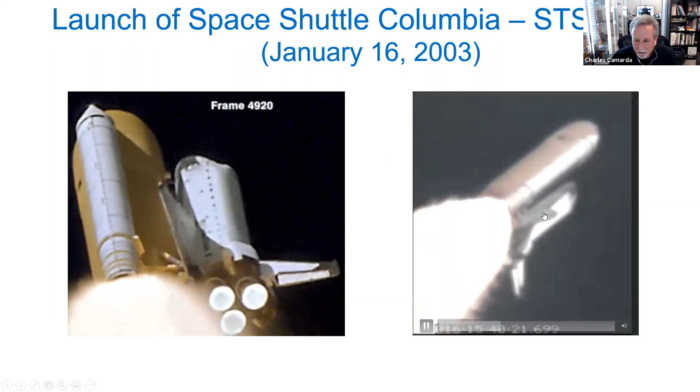If you look on the left, if you look on the right, it shows another view of that foam, and it's pretty obvious it strikes the bottom of the vehicle. Not quite sure if it hit the white section, which are the shuttle tiles, or if it hit the dark section, which is the wing leading edge.

What's important to note is that the people on the ground, the really smart engineers and program managers that were in charge of this mission, when they viewed that video and they ran their calculations, they determined that it was not a problem.

And what we all know now is that during entry on February 1st through the Earth's atmosphere, the vehicle broke up and we lost the vehicle and the crew.

So one of the main questions I had when this happened was, I was in Russia, was how could these really smart people make such a bad decision? And so even really good engineers, if they do not think critically, if you don't have a psychologically safe environment, what happens is you can't raise your hand, you can't speak up.

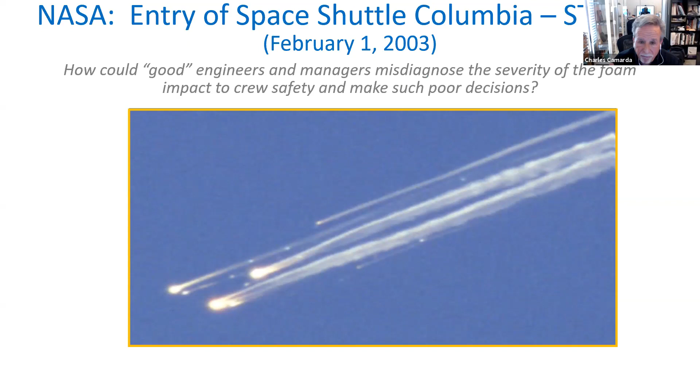And so this happened. And so we spent the next 2 years, 2.5 years, trying to understand the cause of the accident. We literally had and figuratively had to pick up the pieces.

We had about 85,000 pieces spread across southeast Texas. We had hundreds and thousands of folks combing the area in these rural areas of Texas, picking up the pieces, putting them together, and now we're trying to do that forensic analysis, trying to put the pieces together to figure out what caused the problem.

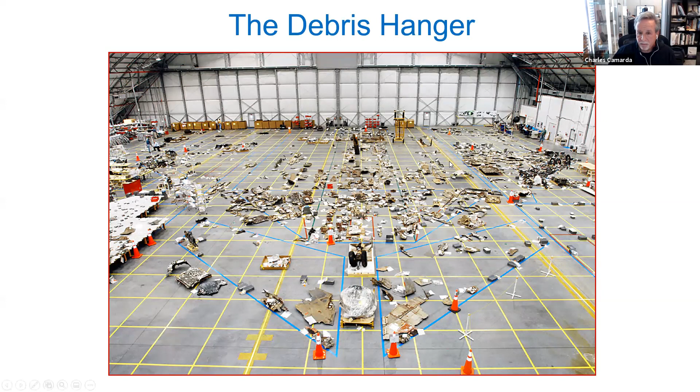And so this really began the origin of the EPIC Challenge program. We developed an innovative conceptual engineering design methodology, or ICED, and I'll talk about that. We started right after the accident, putting teams of people together to understand what caused the problem.

We then created a small team to determine a repair technique on how to fix the wing leading edge.

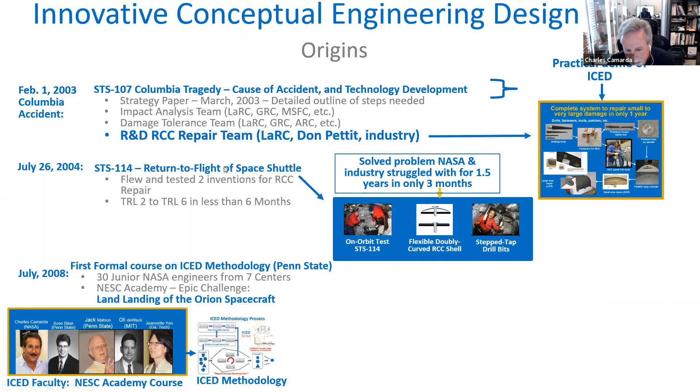And then after I came back from my mission, basically developed this methodology and this program with four other faculty from Georgia Tech, Penn State, and MIT. And we taught it for young NASA engineers.

So in 2008, we developed this methodology. We went to Penn State, and in 1 week's time, we took 30 young NASA engineers and we ran them through this program.

And the problem that we picked was a challenge that even NASA was struggling with at that time. It was basically designing a capsule to land safely on land. As you know, Space Shuttle lands on land, but it's a winged vehicle, and all of the United States' space capsules land in the ocean.

Okay, so we went to Penn State, we posed this problem. We created an environment where the researchers were immersed in the problem. They could then use the facility there to use computer programming to kind of analyze the problem and build some of their ideas. So they were able to prototype some of their ideas.

We ended up with dozens of ideas from that 1 week training session. And we selected only one of those ideas, which you see here, which was an airbag concept. And we basically took that one concept and we went to a group of students.

We had an MIT master's degree student, Sydney Do, and 8 MIT and Penn State undergraduates work with her for about 2 years on and off. They matured an airbag concept and ran a series of subscale and full-scale tests. They proved that their concept would work, that it would enable astronauts to land safely without injury.

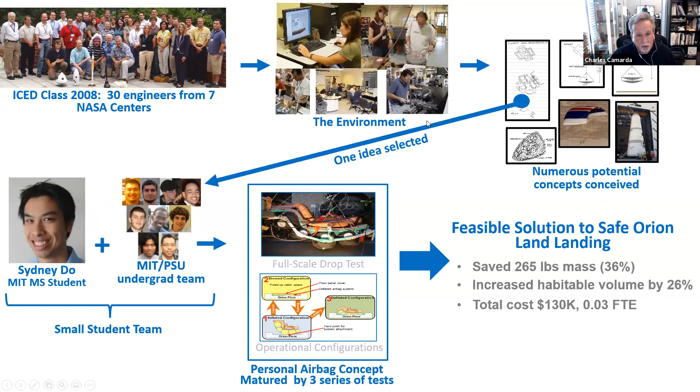It would also reduce mass by about 36% and increase the habitable volume. This proved that the concept and methodology works, the idea that we could take some of these epic challenges to students like yourselves, and have students around the world help NASA and industry try to solve these really big challenges.

So these are some of the themes of the ICED methodology. The first one is the human mind, use it. We try to teach students to think creatively, use their mind, not only rely on computers. We want to teach them to work together as a team, not be arrogant, but accept everyone's input and factor that in when solving problems.

The other theme is understanding the mechanisms of failure. As you go through this process, as a member of a team you'll have lots of ideas. You're going to share those ideas, and what I encourage you to do is look at every idea objectively, even your own. Critically assess and think about all the different ways your ideas could fail. Failure is very important in this process.

Failure is not an option - in this program, it's a requirement. We're going to teach you as students how to design experiments so you can fail smart, fast, small, cheap, early, and often. We want you to fail intelligently, and teach you how to run experiments in the laboratory so you can close the knowledge gaps and gain as much information as possible to understand the problem.

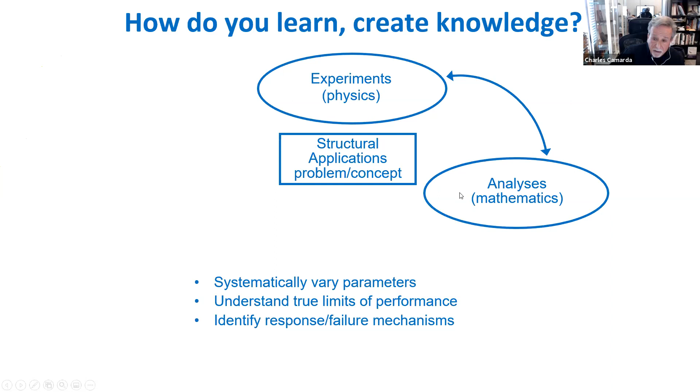When that happens and your analysis is then validated or verified, you can then use the computer and your numerical or analytical understanding of the problem to now look at lots of different ideas, lots of different variations of ideas, and you analyze them numerically. And you try to come up with an optimum design. You're constantly looking to improve your design.

Once you come up with what you believe is an optimum design, then you go ahead and you test that design by an experiment. You do this because more often than not, as you're moving through this design space, varying parameters, you may have exceeded an assumption or a requirement, and your analysis might not hold. So more often than not, you will find that happens, and then you go back to your analysis and add that constraint or that improved understanding of the physics of the problem.

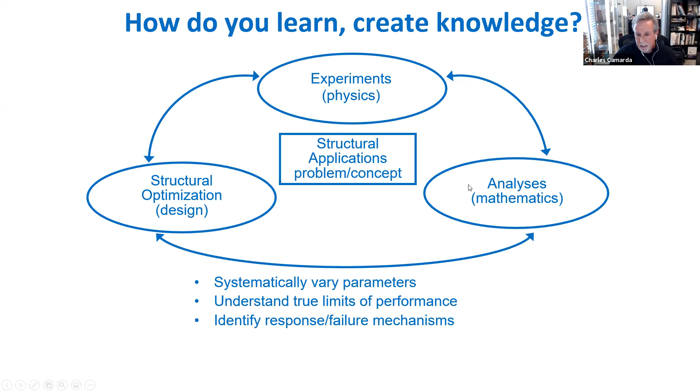The problem is when you're trying to design a hydrogen tank, hydrogen is a very small molecule and it's very easy for this system to leak. And so if you have a leak in this cryogenic tank, it could fail. It could fail because liquid leaks into the honeycomb. When you launch the vehicle, that liquid heats up, it expands very rapidly, it could blow the honeycomb apart.

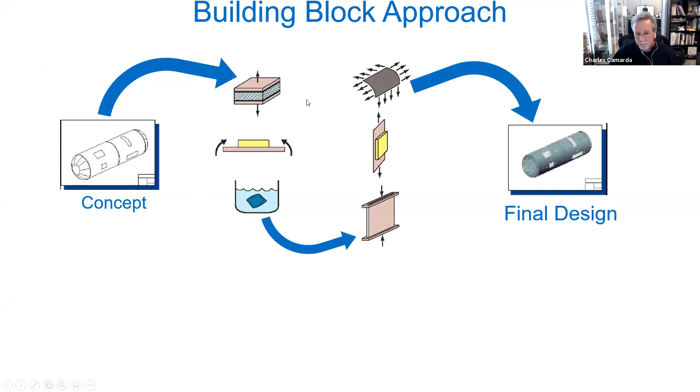So what we did was we designed lots of small experiments and we stepped through this process, gradually building up understanding combined loading that this structure would have to take in this cryogenic tank before we actually build the final design. Now, what happened was, and this we call intelligent fast failure, and we'll teach you how to do this as part of the ICED methodology.

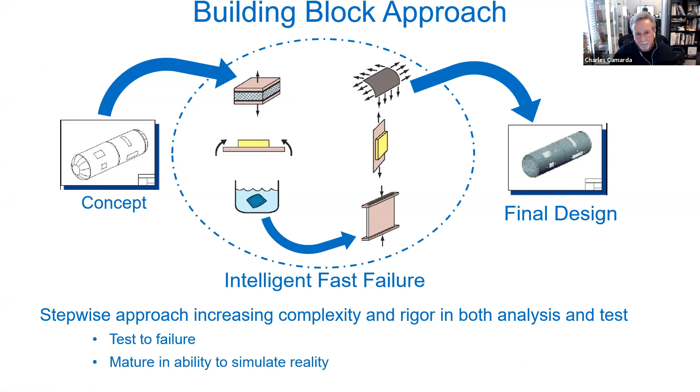But if you fail to do this, this is a real program, okay? This was a single stage to orbit vehicle called the X-33 vehicle. It was contracted by NASA to Lockheed to build a single stage to orbit prototype. It would be a demonstrator. What happened was the program built the very large honeycomb tank without using that building block approach.

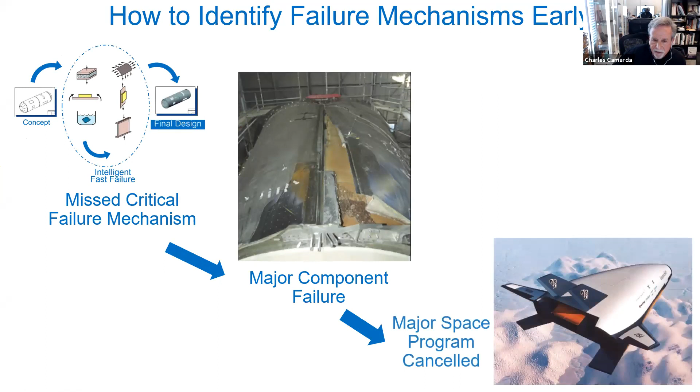And what happened was it failed in final design with a full-scale test. And because of that, it totally canceled the entire program. Because this failure happened late in the program, it cost a lot of money up to that point to actually build this concept. And when they failed, they had no backup. So what I'm telling you is by not doing that building block approach, entire programs could get canceled.

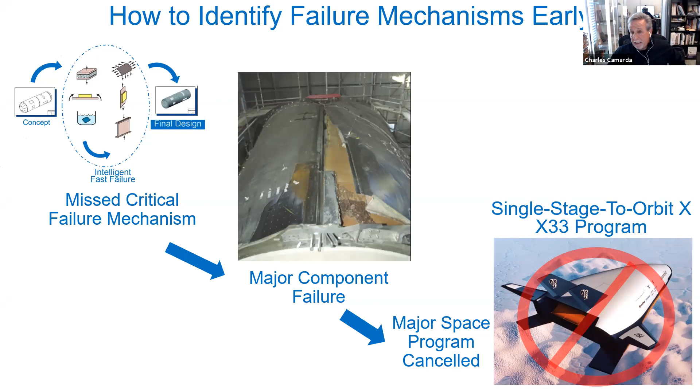So this is the ICED methodology. You're starting it just now. You're just starting to form teams. Very early on, we will teach you how to form teams, how to work together as a team, which is very important. And then we're going to teach you how to immerse yourself in whatever problem you're trying to solve. You have to work together as effectively as possible as a team.

So what you have to do is you have to quickly understand everything you possibly can about the problem. These are very large, complex problems, so you need to divide and conquer. You need to split up, and different people on the team look at different aspects of the problem. Then you have to come together as a team and share that information, and we'll show you how to do that.

The next phase, as you're stepping through this understanding of this problem as a team, is now once you understand or think you understand the problem, you have to try to come up with ways to solve the problem, and we're going to teach you how to do that. There are several techniques we teach you working together as a team, maybe brainstorming, biologically inspired design. We'll teach you different techniques for expanding and enhancing your creative approach to solving the problem, and then you'll end up with lots of ideas.

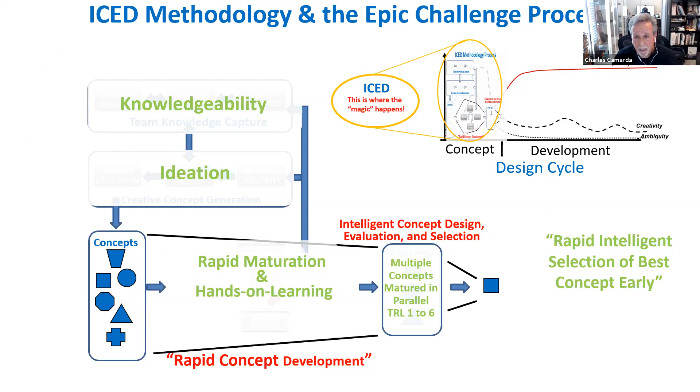What happens is we down select to an idea that we think is good without fully understanding that concept, without evaluating all the different ways it could fail. So we go into a development program, like you saw with the full-scale tank, with one idea. They honed in on an evacuated honeycomb core sandwich panel. Then late in the design cycle, as they're manufacturing a full-scale design, they fail. They have no backup and have to start from scratch. This is what causes lots of programs to be delayed by years in some cases, and for costs to rise exponentially.

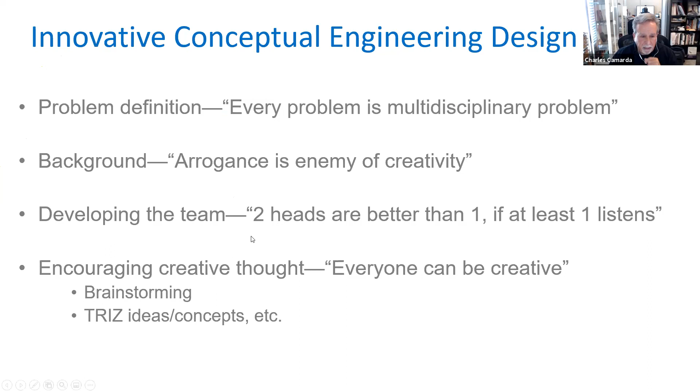So what we're going to do is show this ICED methodology, if you will, and apply it to the return-to-flight wing leading edge problem. Right now we're going to go through these steps: the problem definition of what caused the accident and the problem we are going to solve, how to repair a wing leading edge. We're going to show you a little bit about the team we developed, and some of the techniques we used.

So when we're looking at this problem, we have to look at all the different constraints on it. Once we understand what caused the problem, if we're going to repair the wing leading edge, we have to understand the temperature limits. How hot does the wing leading edge get at its hottest location? What happens if we just damage the coating slightly? Will that cause the entire hole to grow on the wing leading edge? Hot gases go in, and will that cause failure of the vehicle?

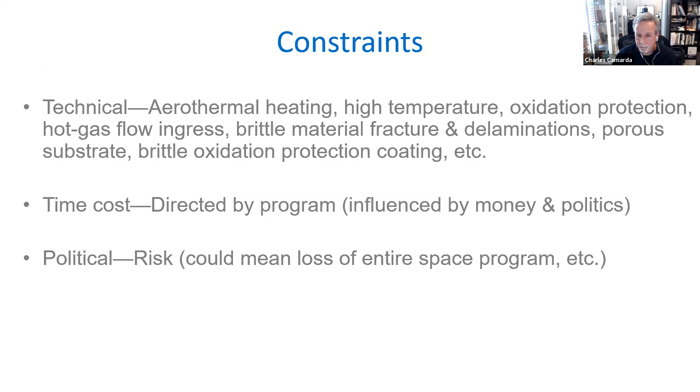We are often constrained by cost. NASA doesn't have a tremendous amount of money. We're constrained by time—we want to solve this problem as quickly as possible. We also have political pressure. If we fail to solve the problem and lose the next crew that flies, will the entire space program in the United States be canceled?

We have to think of all our techniques for fixing the vehicle. How are we going to operate those solutions? In other words, if we're trying to fix a wing leading edge on orbit, we have to think about the astronaut in the spacesuit, constrained by the pressure inside the suit, the dexterity of the gloves, things like that. And once we come up with an idea, how are we going to validate it and make sure the people on the ground, NASA, and the safety people will certify that we can actually use this in space?

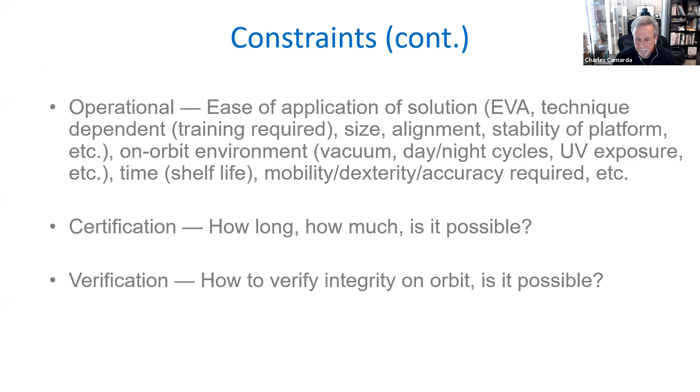Some of the things we also want to think about as we're looking at new ideas: we want to look at contradictions in the problem, because usually if there's a contradiction, this is an opportunity for a designer to come up with an enhanced or breakthrough idea to solve the problem. For instance, in the wing leading edge, thickening it to make it tougher will also cause the external surface to be hotter and might exceed the temperature limits. So we're going to look at some of these contradictions.

Once again, we want you to make sure we look at every problem as if it's a multidisciplinary problem and part of a much larger system.

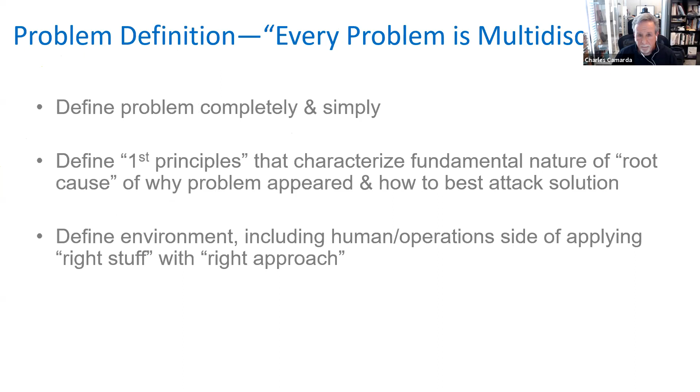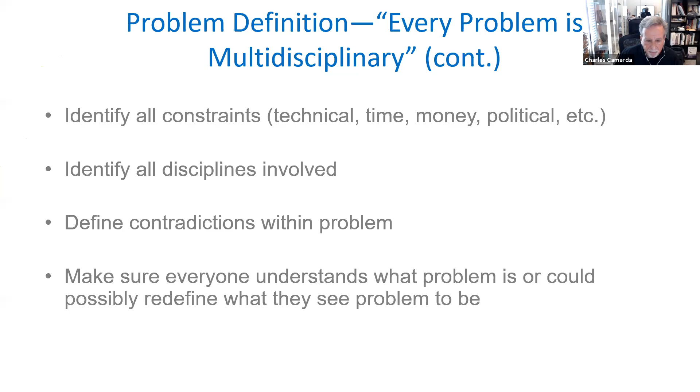Every problem's a multidisciplinary problem. We want to identify all the potential constraints, look at all the different ways it could fail, look at the contradictions within the problem to see if there are opportunities.

So for the wing leading edge, for the Space Shuttle STS-107 Columbia accident, we want to pan out and look at this problem.

So this is what NASA did. Basically, right away, they started looking at what was the root cause of the problem. A large piece of foam came from the external tank, the bipod ramp, and it struck the vehicle on the lower surface, either on the wing leading edge or on the fragile thermal protection system tiles.

Taking a look at that just gives you some idea of the size of the debris. The piece of foam could have been as large as 2 pounds. It had the density of about styrofoam, and it was traveling at about 545 miles an hour.

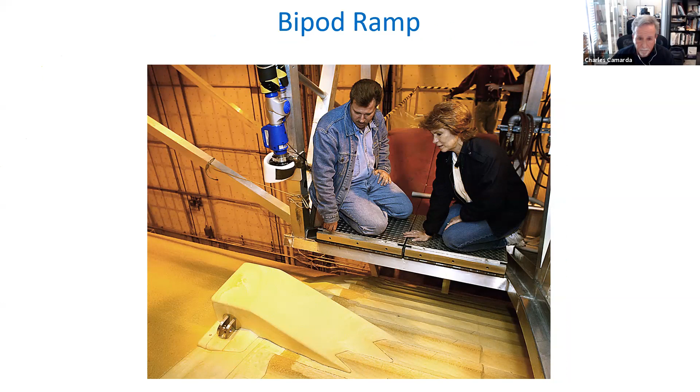They made these calculations based on the video that we received. They analyzed this video and they determined that the relative velocity of impact was about 545 miles an hour.

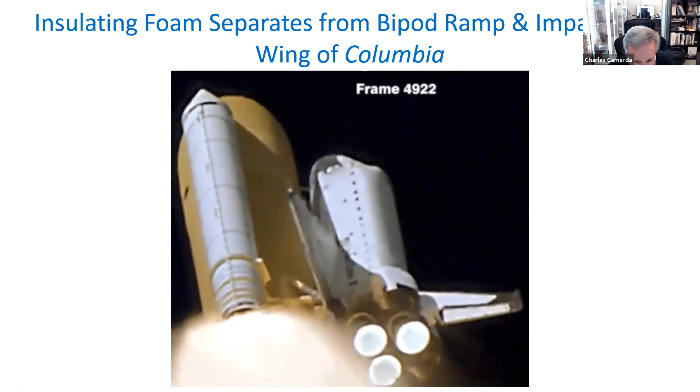So the people in the hangar at Kennedy Space Center, they started putting the pieces together, the debris that they found on the ground. These are the pieces of reinforced carbon-carbon wing leading edge panels 5 to 10 that were put together at the Cape. It's from the port wing leading edge.

They collected lots of the pieces, but some of the pieces were missing. We think a lot of the damage, based on the video footage, it appeared that it struck probably between panels 8 and 10. When they started looking at the debris of these panels, you notice the inside surface is coated with a silvery coating.

What we believe happened was the panel was damaged. Either a large hole appeared or a crack grew. Hot gases ingressed the cavity of the wing leading edge, and it was so hot it vaporized the metallic structure of the vehicle. That vaporized metal then deposited on the inside surface of the wing leading edge.

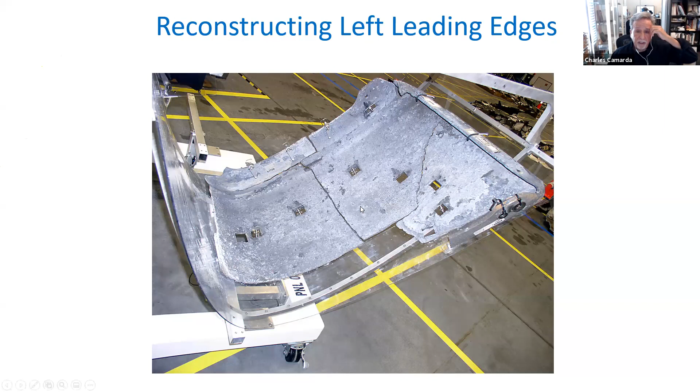This is what the engineers on the ground believe. It really appears that a large piece of foam caused the damage. So in order to understand if that was true, they developed a full-scale test.

The way they originally decided to do this test, it was going to be a full-scale test, a very large pressurized gas gun shooting a large piece of foam at a full-scale section of the wing leading edge. How they originally planned to run this test, had they done it the way they originally planned, it would have been a very dumb, expensive test.

They weren't planning on doing any analysis to understand if they could predict what was going to happen before this test. And they did not have enough instrumentation on the test element in order to correlate their analytical predictions with the test. If we had allowed the Columbia Accident Investigation Board, if we had allowed the engineers to run this test, we would not have been able to get much information from that test.

Instead, we told them to follow the methodology we showed previously, basically conducting intelligent experiments and using a building block approach. We collected the subject matter experts.

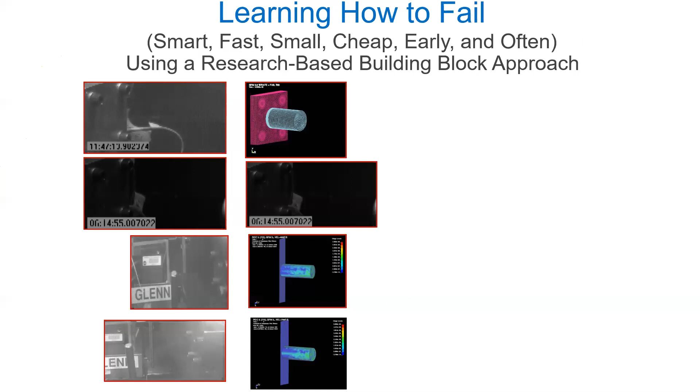They would have had to put in every new wing, a leading edge, and a new angle each time, if they wanted to do it that way. So exactly - as a research engineer, especially watching them proceed like this, I said, no, you have to stop this.

This is not how research engineers and real engineers solve this problem. It would have told the program office, hey, we understand what the problem is, but it would not have helped us proceed with the program and predict what size pieces of foam would be okay - when would we draw the limit? That's exactly right, Anna. So instead of letting them run this, we instrumented this wing leading edge.

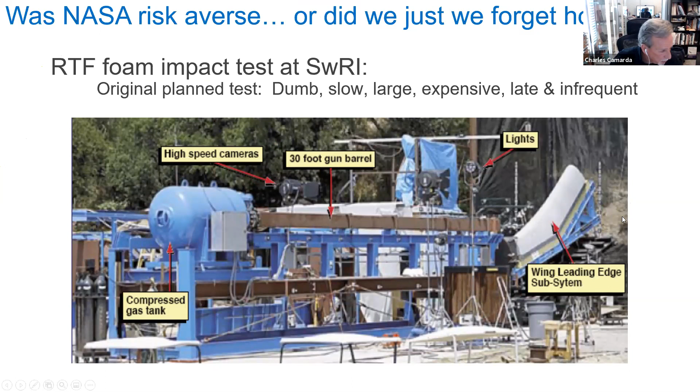With the full field photogrammetry system inside the wing, we could look at millions of points inside that wing leading edge. We can understand how it's going to deform, and we have test results that we can now compare with our analytical results. That's a very, very good question.

Does that answer your question, Anna? Yes, thank you. Okay, so what did we do? We went to the really good researchers at NASA Langley, at Glenn Research Center, and our friends at Boeing, and basically used a building block approach.

We're looking at modeling the foam, conducting tests of just small pieces of foam. Now we could run these tests - this is what I call smart, fast, small, cheap, early, and often. We can run hundreds of these tests inexpensively until we understand and can predict the physics of how that foam is actually going to fail.

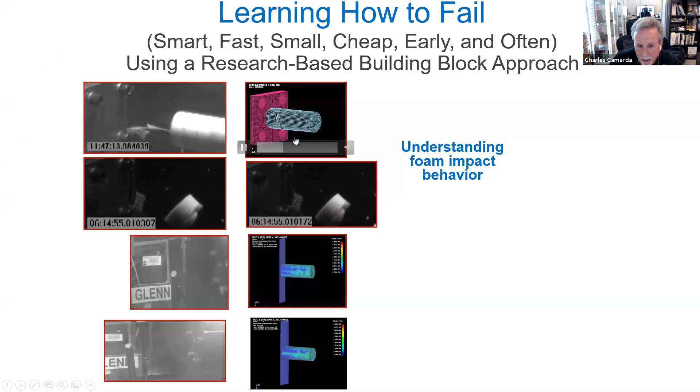So now you see we have good working models predicting how the foam fails. Then we proceed to conduct tests of that foam impacting material - small coupon specimens of the wing leading edge made out of reinforced carbon-carbon.

Now you see two tests at two different velocities. In one case there's no damage and the specimen survives. In the other case, there's lots of damage to the foam and also the target material, the carbon-carbon material. Now we feel like we understand the physics of not only the foam, but also the target material.

Now we can use those analytical models - this is what the scientists did - to predict what would happen. This shows an impact of foam to that full-scale wing leading edge that the analysts were able to predict prior to actually running the test. So now when we run the test, and this is a full-scale test...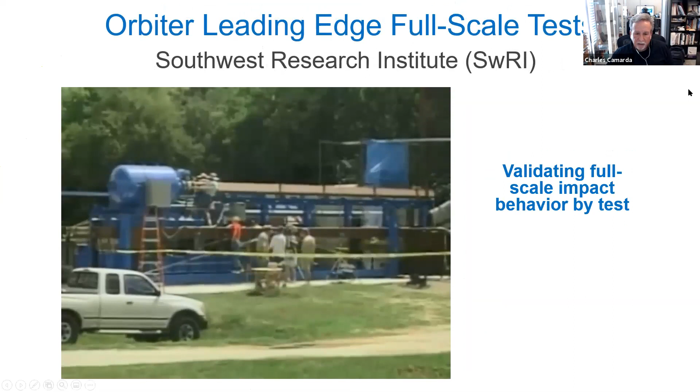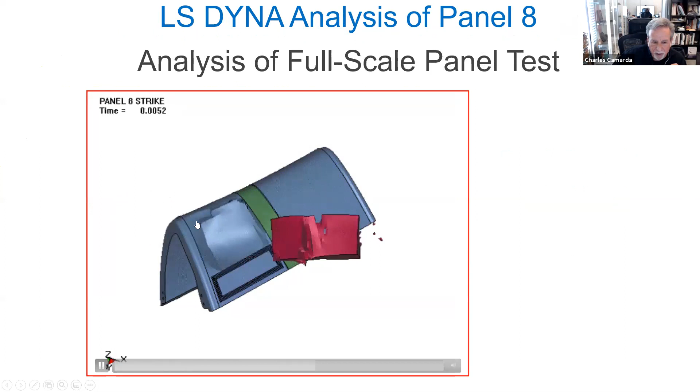You see what the folks predicted analytically was actually what happened. When you look at what they predicted, you almost see a 14-inch by 14-inch rectangular section almost coming away. And then when you look at the actual test, you see it's very good correlation with the experiment.

So continuing to do small tests and some large tests, we were able to develop a very precise way for predicting failure. So now we pan back out - that's just an example of using that building block approach and that method for constructing knowledge, going to the laboratory, conducting experiments. Now we understand what caused the problem - we know it was the foam. Now we have to figure out a strategy, and this is what the folks at Mission Control and at NASA had to develop.

This is almost every NASA center - we have people working on this problem. How do you develop a strategy to make sure that we won't have a problem the next time we fly, or if we have a problem, we can keep the crew safe? So the first thing we have to understand is what's causing the foam to come off.

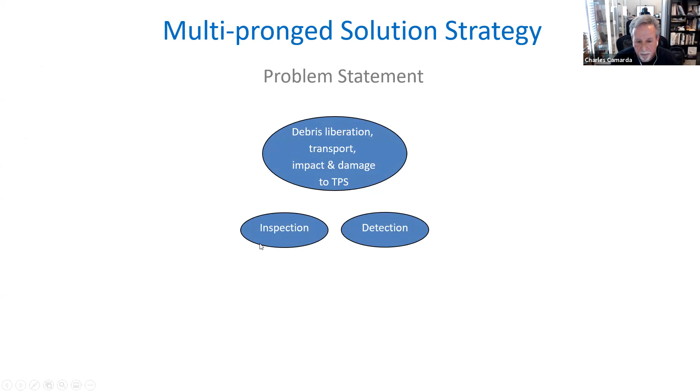We want to be able to inspect the vehicle after we launch it this time. Maybe put detectors on the vehicle to understand if a piece of foam hits someplace critical. This is what I call a multi-pronged approach to ensuring that we could fly safe.

So we're looking at ways to minimize or eliminate the debris source, ways to toughen the vehicle, and developing an on-orbit repair technique. If all else fails - if we have a large hole and we can't fix it - we're using the International Space Station as a safe haven. That means we take the crew, dock with the space station, the crew gets off, and we rescue that crew with another vehicle - flying another vehicle in time to bring that crew home safe.

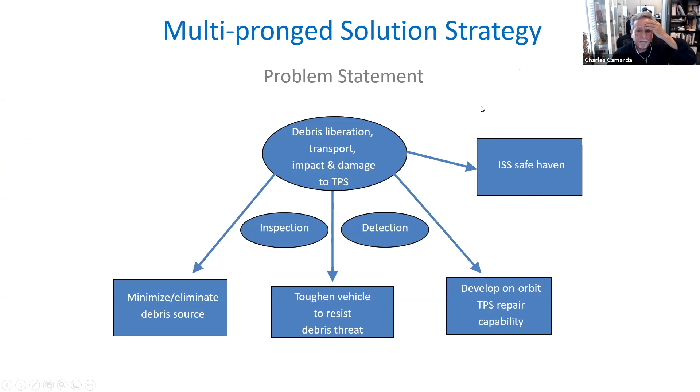The other thing we have to do as we're looking at all the different teams forming to solve this problem is understand the big picture. Remember, I said we have to pan out. You have lots of teams working on this problem.

We have an inspection team asking how do we build cameras to inspect the vehicle to determine damage. We have an impact threshold team that has to understand how small the damage can be and still be critical. We have to make sure that whatever instruments we design can see this damage. Otherwise we're flying blind, thinking we're safe when we're not.

So all these different teams have to work together. Information from one team has to be passed to the other team, and they have to work very closely. When NASA first started looking at this problem, these teams were totally independent and not communicating with each other. So as you form your teams, you have to make sure you have a plan of communication, and we'll talk about that.

Now, once you understand the big picture, let's zoom in on a particular problem. The example we'll zoom in on is the wing leading edge and fixing that large hole. One of the first things we do is understand the problem, dive into everything about the wing leading edge and its material, and look at other ways people have tried to fix structures in space, and analogous problems.

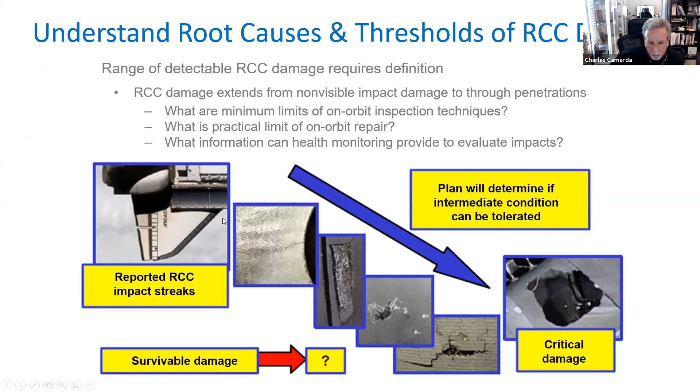We're trying to understand everything we possibly can about how a damaged piece of reinforced carbon-carbon material, the material that makes up the wing leading edge, is going to behave. So the first thing we have to do is bring in the material scientists, the people who understand how this material was made.

When you look at this material under a microscope, it's a system unto itself. It's composed of carbon fibers and a carbon matrix. The outer layers of that material, on the inside and outside surfaces, were conversion coated to silicon carbide. Silicon was basically packed on the outside, then heated, causing a chemical reaction that created this silicon carbide coating.

Now you have two different materials with micro cracks, so they had to figure out how to protect this very fragile carbon material so it wouldn't burn up going through the atmosphere. Oxygen can now penetrate it, and if you add oxygen and heat, this material would just burn up. So the only thing protecting that material was this very thin, brittle coating.

You have to understand everything that was protecting that material from burning up, in order to figure out how, if you have a crack or a hole in this material, you could possibly fix it. This is a special material — it actually gets stronger at 3,000 degrees than at room temperature. But you have to understand how this material behaves.

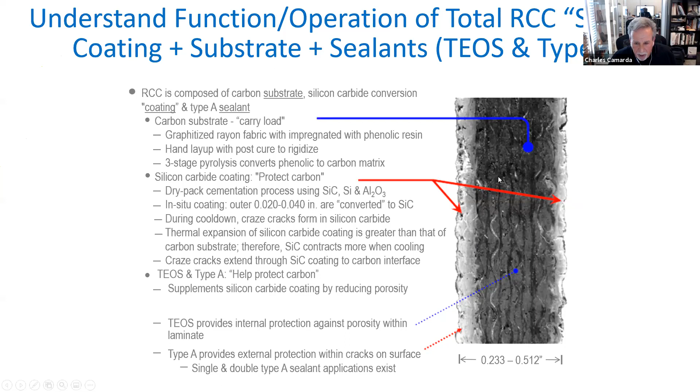When the flow strikes the downstream lip of that hole, the heating there is very high. So if the flow is at an angle to the vehicle, you have much higher heating in the downstream lip. This will determine how this hole grows, how fast it grows, and it gives us some idea of the limitations or what size hole could potentially cause critical damage.

What we learned from that was that the way we had been testing this material was 90 degrees to the flow, on the bottom. We thought that was the worst case. Once we learned that flow at an angle was a much worse case, we started to change the way we tested.

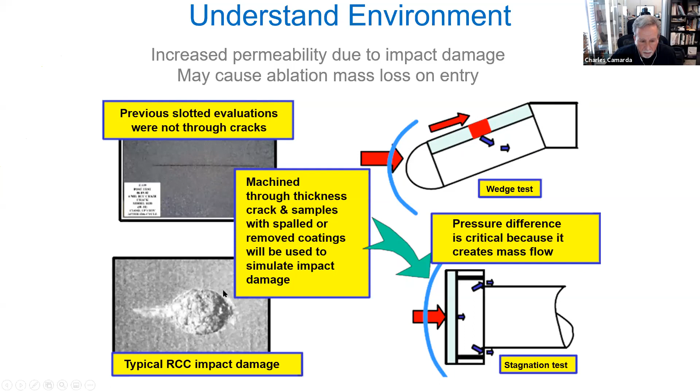We have small coupons of this material, and we're now damaging those small coupons with slits and impact damage, trying to understand how that damaged material will react and respond after 10 to 15 minutes in a very high temperature flow. Here the flow is from the bottom up, and you notice a small slit grows. Since the flow is from the bottom to the top, the downstream lip gets much hotter, so instead of growing symmetrically, it grows like a wedge.

So this analysis and this phenomenon that Pete Gnoffo determined using computational fluid dynamics, we now go into the laboratory and understand that this is a real phenomenon, and we have to change the way we test.

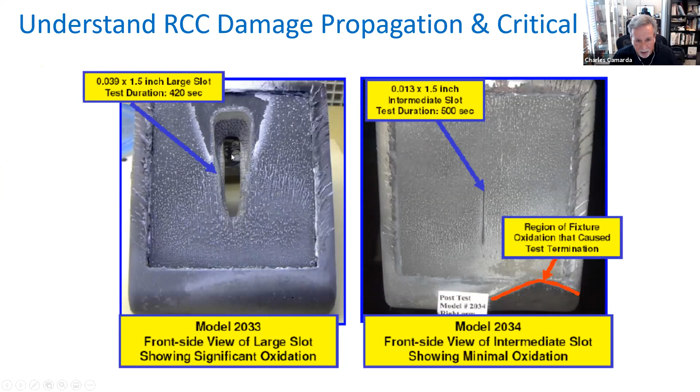We also need to understand all the different anomalies within this material. There are voids in the surface, there are delaminations. What happens if you have a crack? What happens if you have coating loss? One of the things we did was we looked at ways we could possibly repair this.

So we looked up— we have a question? Could I have another one?

Yes. I realized, all these years we talk about this, I never asked this question. The problem actually happened when they were coming back, during re-entry. So I'm thinking now, how come we didn't notice anything while they were going up? Because the hole was already there.

Right, the hole was there. That's a very good question, Anna. This crew, this poor crew of STS-107, did not have the means to basically inspect to see if there was a hole there.

People on the ground said maybe we could use U.S. Air Force assets, and they would be good enough to image the vehicle and determine if there was any damage. But the people on the ground asked to make that request to the Air Force, and people at NASA denied that request. There's a whole lot of other reasons why that happened, and it was a very bad decision.

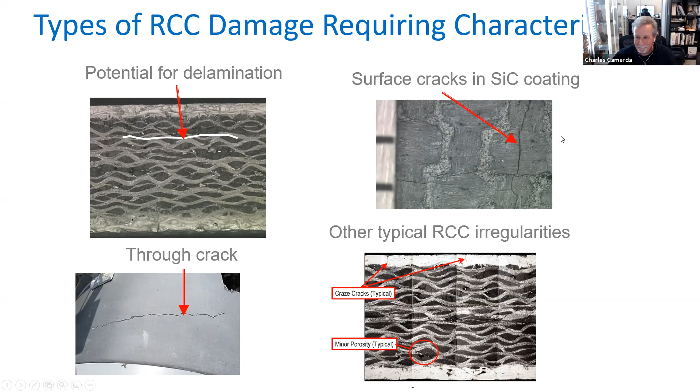Does that help? Yeah, thank you. Okay, and believe me, Antti, next time I see you, we could go into excruciating detail on this. Yeah, we can. But if you read the Columbia accident investigation reports, like I said, it's 6 volumes, and one of those volumes actually talks about the impact analysis and how little they really understood about the problem.

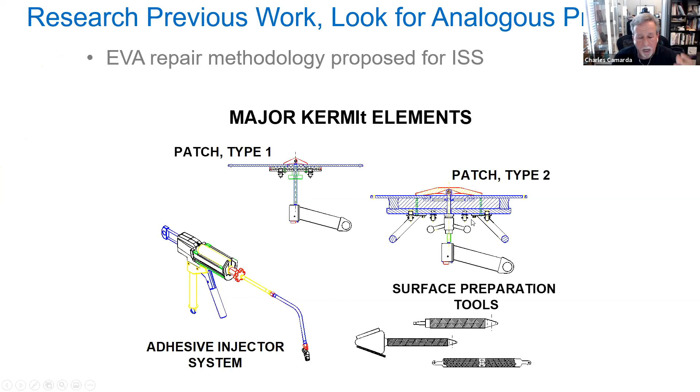Okay, so what I'm going to focus on now is the problem that we chose to work on, one of several, what I call an epic challenge: how do you fix that pizza box size hole in the wing leading edge? So I went back and looked at other techniques that astronauts had been training to fix a hole in the pressurized modules of space station, because I happened to be involved in this program, so I knew about this. When you're looking at fixing a pressurized hole in a large module, like the laboratory module, an astronaut goes outside, you basically put a mechanism with a toggle bolt, and you screw down a fixture, and then you inject an epoxy into that hole, and you make a nice, firm, solid repair.

What I'm telling the students is, once you're looking at a problem like repairing a hole in a wing, look at any possible way you could think of to repair a hole in something you're familiar with—it could be a tire, it could be the wall of your house. In this case, we were looking at something we knew we had designed and an astronaut would be able to operate in space. But these are the types of building block tests we would have to do eventually to ensure it was operable, that an astronaut could go outside and actually do this in space.

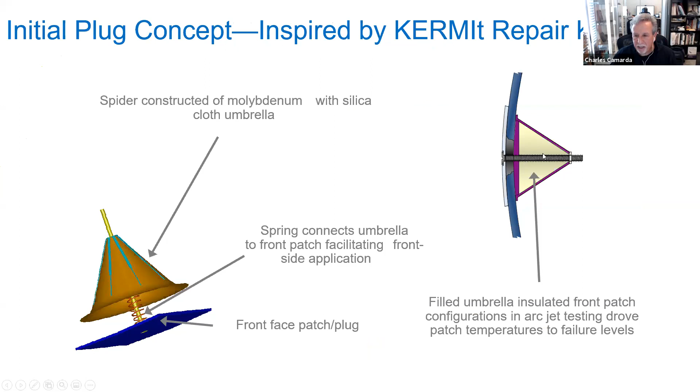So this is where we got the idea for this kind of patch that goes through, and we fill that patch with an epoxy.

I want to show some of the people we pulled together on our team. This was a gentleman who was a material scientist at ATK Thiokol, and he really understood how to fail smart, fast, small, cheap, early, and often. He started looking at hundreds of different ideas for designing a plug that would survive entry heating.

So you go about using very crude techniques so you could go through lots of different ideas, but you want to realize the techniques you're using don't exactly simulate aerodynamic heating. You're trying to simulate the temperatures and make sure this particular concept would survive them, but not the flow conditions—could flow go underneath that patch, and will that help erode it? But what it does is help you screen lots of different ideas.

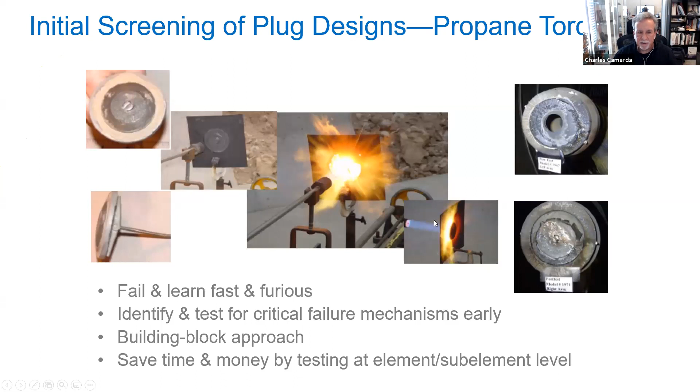And you can do this very cheaply, very quickly. So when you look at the designs they came up with, using those techniques and with very minimal analysis...

They came up with these very stiff plugs made of the same material as the wing leading edge, carbon-carbon. But the flow is from the bottom to the top, and these plugs were thick, so you have a bump to the flow. This bevel angle was steep, so as the flow hits that ramp, you get additional ramp heating. All these conditions, plus the fact that it was stiff, meant you needed somewhere between 1,300 and 1,800 plugs—you had to carry a repair kit with about 1,800 different shaped plugs to fit all the different curvatures of the wing leading edge.

The other thing the program office was looking at was how to fix just a crack. So they came up with a special material, a pre-ceramic polymer. It starts out as a polymer, solidifies in space, and forms a ceramic material. It's able to flow through a gun, kind of like a caulk gun. The astronaut applies it in space, and it has a whole toolkit that comes with it.

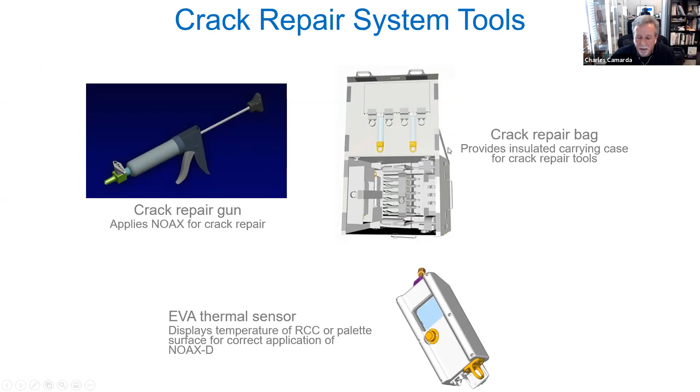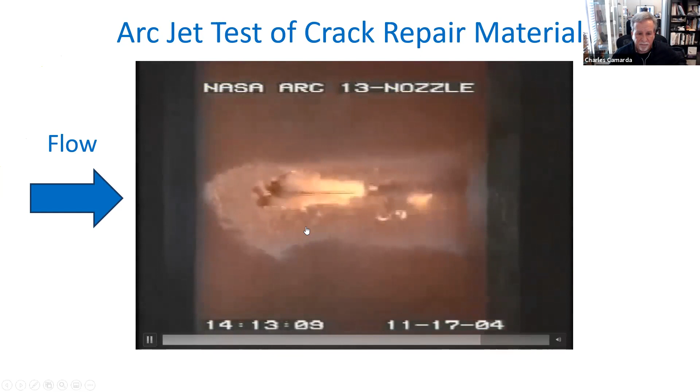But when we tested this material over a small crack, with flow from left to right, you see it getting very hot. As the material starts getting hot, even though it's forming into a ceramic, it becomes fluid and viscous, and starts to separate and move away in the flow. As that happens, the crack begins to grow, opens up, and you have a problem.

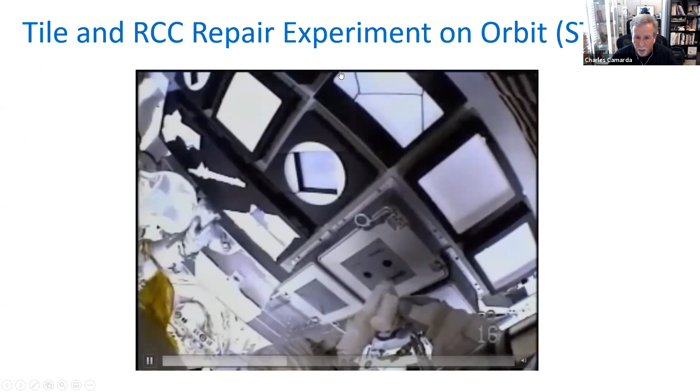So we tested lots of these ideas. In our particular mission, this is Steve Robinson and Soichi Noguchi—we tested ways to fix the RCC material on orbit. We had damaged tile material in the payload bay, so this is where we're actually testing these ideas and their operability in space.

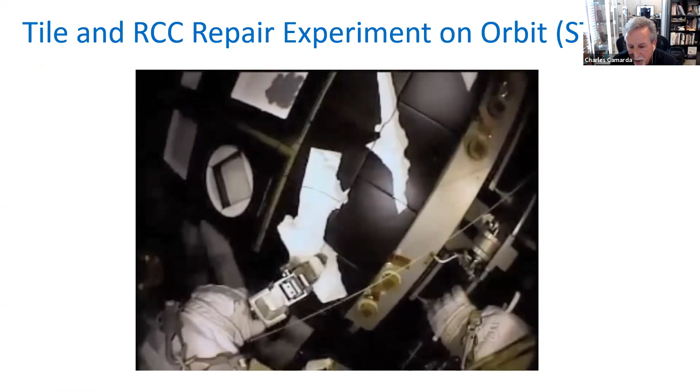Here he's using a technique for coating the white surface of damaged tile so it would have a high emissivity and wouldn't get too hot, but would radiate that energy to space. And it's showing you techniques for repairing it and applying it.

What I want to show you here is that after Steve Robinson tried to create as good a repair as he possibly could on that damaged RCC material, what happened was that material expanded in orbit. It outgassed because we have a vacuum in space, so any elements of gas trapped in that material, when you put it in a vacuum, would expand. Now, we tested this in vacuum chambers on Earth, but space is a very large vacuum.

So let's say you repaired a wing leading edge in space and it looked like this. Would that survive entry? How do we validate that that would be good enough to survive entry? And we could say, yeah, we'll put the crew on the vehicle and say they're okay to fly home.

When we actually tested repaired leading edge specimens, this one had a circular area that was damaged, but you notice that the material we used, that NOAX material, was slightly too thick, and it cracked. So when we put it into the arc jet and tested it, a piece of this cracked material flaked off, and that caused a step to the flow.

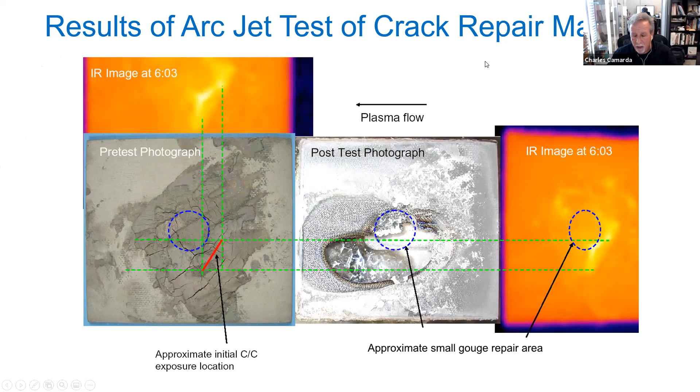That step flow caused this increased heating that you see here. So we think this was repaired, but we see that it actually caused additional heating and caused the hole to grow. If we would have used that material in that situation and said it was okay, we would have potentially lost another crew.

These are the things you have to think about when you're trying to investigate all your ideas. You may have been on a team that was looking at that material. You're excited, that's your idea, that crack repair material, you think it's going to survive. You have to look at all the different ways it could fail because you could be wrong.

When we saw that these teams were having problems, this is when I called together what I call a research and development team. This is when we had the Friends of Charlie come together and we used the ICE methodology and looked at all the different ways we could fix a damaged leading edge. So when I told you I want you to get together as a team and ideate, you draw different sketches and come up with multiple different ideas.

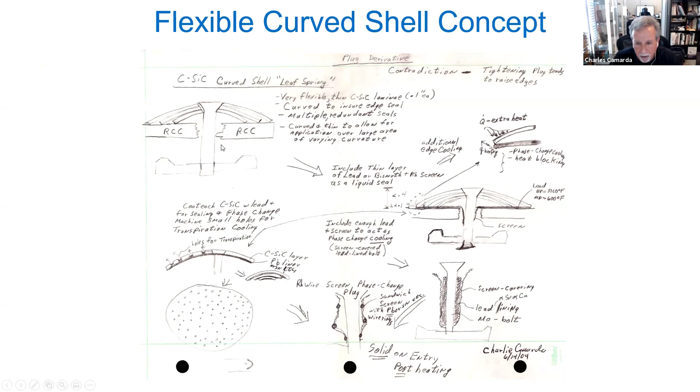You look at what happens if you have increased heating at this region. Is there a way you could design this plug so that a gap won't open up, flow will go underneath that plug and create a large hole. Look at multiple different ideas.

Then you go in the laboratory and start building these ideas. You look at all the different concepts, whether it's all the different types of materials you could use, and start testing all these ideas simultaneously. Our particular concept was a drill that you drill and tap a hole in the wing leading edge, put a fastener in that hole, and then basically screw down that fastener.

We looked at maybe using gaskets to prevent flow from going underneath, so we looked at all these ideas simultaneously. If we had a failure during this development phase, we had a backup. And we're going to teach you how to do that, that's called rapid concept development.

I'm just introducing these ideas. What I did was, when I formed this team, I went to my friend Don Pettit's garage laboratory without anyone knowing about it, and these are just some of the different ideas we were able to experiment with and test. So we formed a small team of people around the world.

They sent us their ideas, and we were testing them in the laboratory in Don's garage. And why did I bring Don Pettit into this team to solve this idea?

You're going to find this out. Sometimes you're going to look at your team and realize that maybe you might need some additional help on your team. You might have to expand your team, you might need to look for subject matter experts. I brought Don into this not because he was an expert in carbon-carbon material, he was a chemist from Los Alamos National Lab, but he had this amazing ability to think creatively, to think outside the box, and we needed someone like that.

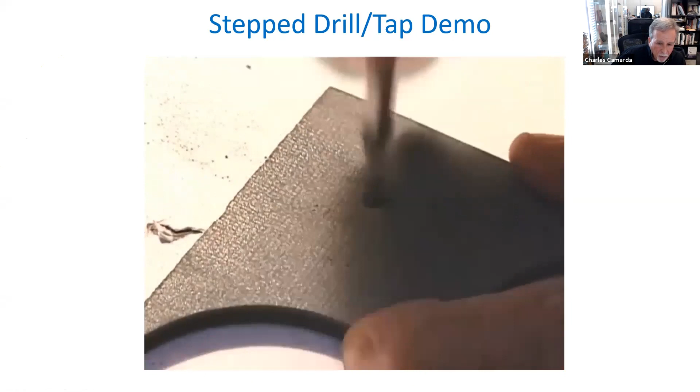So when people told us that it was impossible to drill through this material because it has a very brittle silicon carbide coating, what those people didn't do was they didn't use a punch.

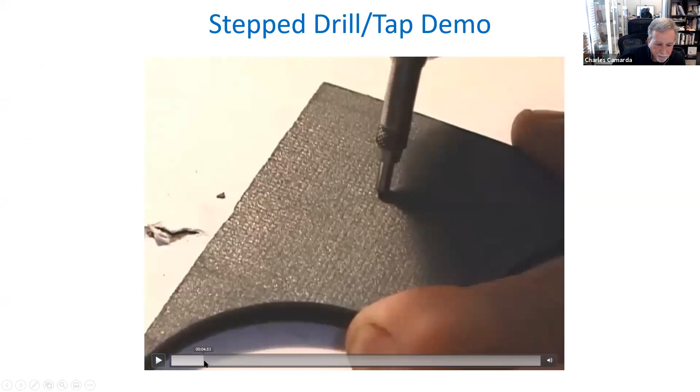Basically, what we did was we used a spring-loaded punch and chipped that coating. By chipping that brittle coating, we were then able to create a drill that could drill and tap precise holes through that material.

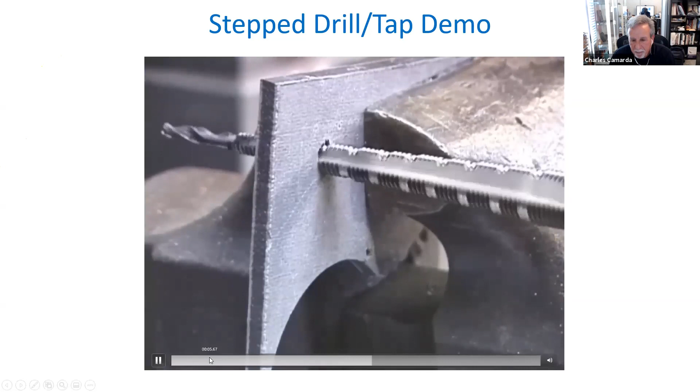And we're doing this in his garage. We solved the problem that teams of people at NASA and in industry failed to do. No one actually looked at chipping the coating before they drilled through it.

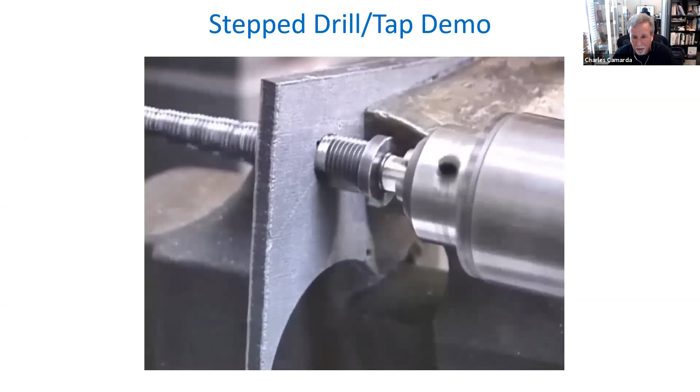So we came up with a solution for drilling and tapping a hole in a wing leading edge, and we validated it. We taught astronauts how to use the pistol grip tool and these drill bits that we designed, so they could drill and tap various size holes in the wing leading edge.

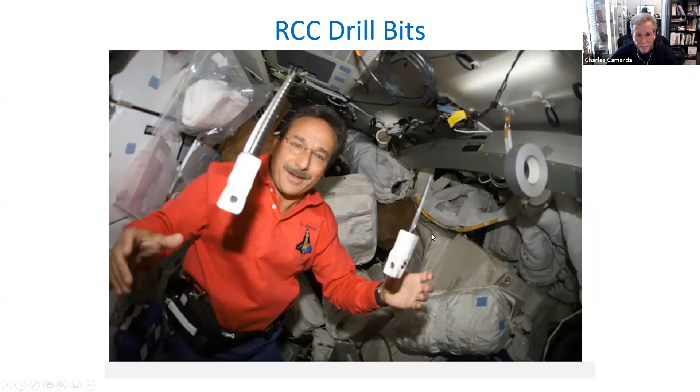This is a photograph of me proving that, yeah, not only could we build it, we could certify it. And I was actually able to fly it on the first mission we flew right after the Columbia accident. People told us this was impossible to do, and we did it in a garage. We got a patent for it.

This was another gentleman who helped us, who had a company in Fort Worth, Texas, Francis Schwind. He was one of the gentlemen that helped us build, not the drill bits, but different fasteners made out of carbon-carbon, different patches made out of carbon-carbon. We had to come up with a way to quickly produce these patches that we could test in the laboratory.

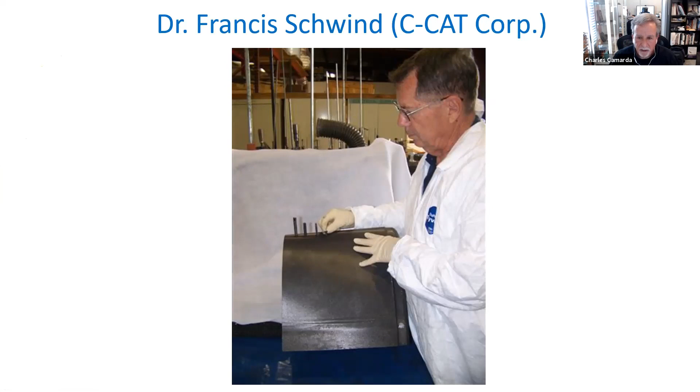I want to tell the teams going out and doing these analyses, you have to sell your ideas to upper management, to people, that your idea is viable. The people in the program office didn't believe our idea would work, so what we did was develop a prototype.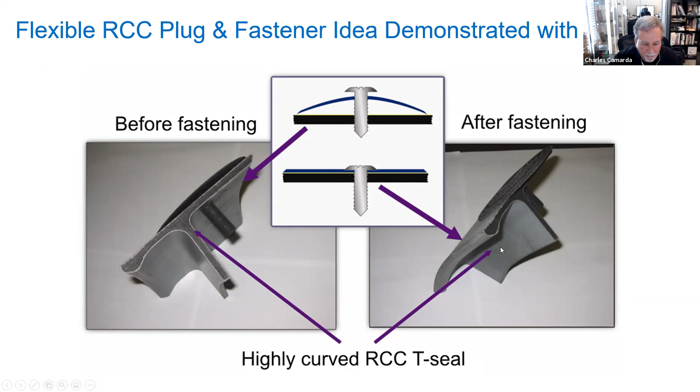We had a large curved section of carbon-carbon material, and we basically drilled and tapped a hole in it. We put in a carbon-carbon patch and a carbon-carbon fastener, and we did this right in front of their eyes, using the same tools an astronaut would use during a spacewalk.

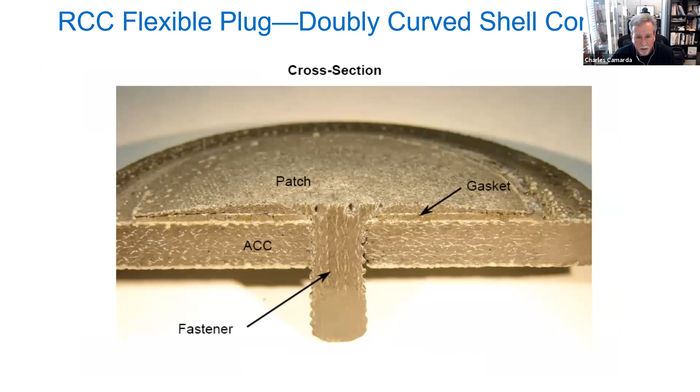This shows a demonstration of what that would look like. And this shows how later on we handed this idea off to other teams, so that large numbers of people now had to do the analysis to validate the size of these patches and what they would look like in order to fit all the different curvatures on the wing leading edge.

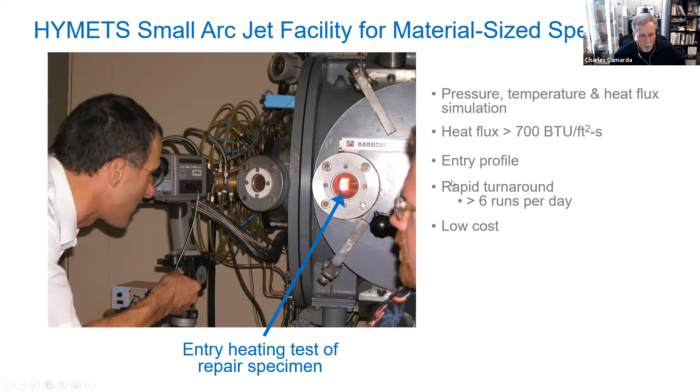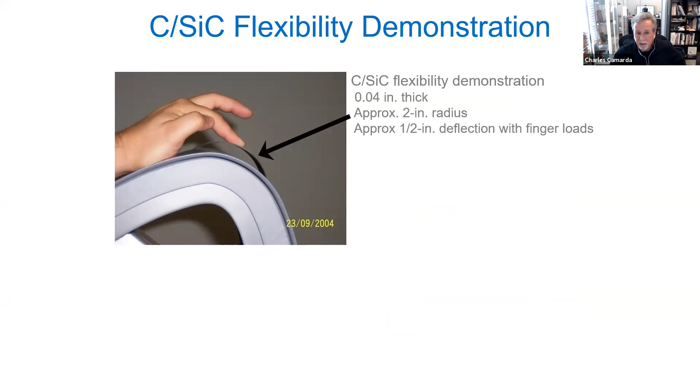These are the different types of testing that Don Pettit and I did. We went from a torch test to a very small arc jet facility that we were able to use. Once the companies realized we could commercially fabricate this material and that it could be flexible, they went out and designed their own patches.

They put large teams of people on this to actually design and validate the patches we would fly in space, and also the tools the astronauts would use, to validate that these patches met all the specific requirements to ensure they would survive entry heating.

This just shows how 8 to 10 to 18 patches would cover a large area.

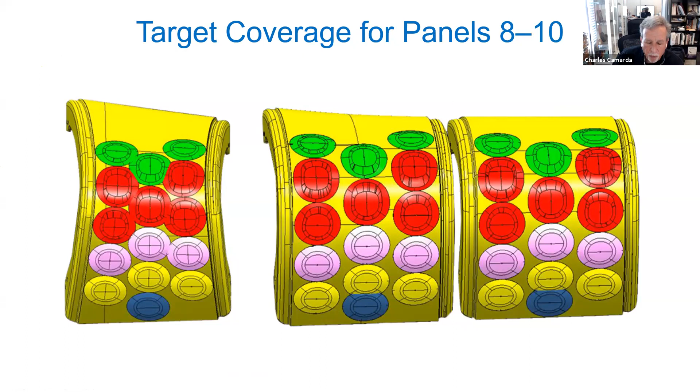This shows an example of why we need to use subject matter experts to understand this problem. The reason the program's patches were failing was that they did not have the right analyst analyzing this problem, and they did not ask that analyst the right questions.

When we put together our team, I brought my friend Pete Gnoffo. I asked him to analyze this problem using a code that he developed. He was an aerothermodynamicist, one of the top in the field in the world.

He looked at this problem, ran his code, and in one day was able to determine that if we maintained the thickness of the patch to less than 4/100 of an inch, and the bevel angle of that patch to less than 7 degrees, it would not fail.

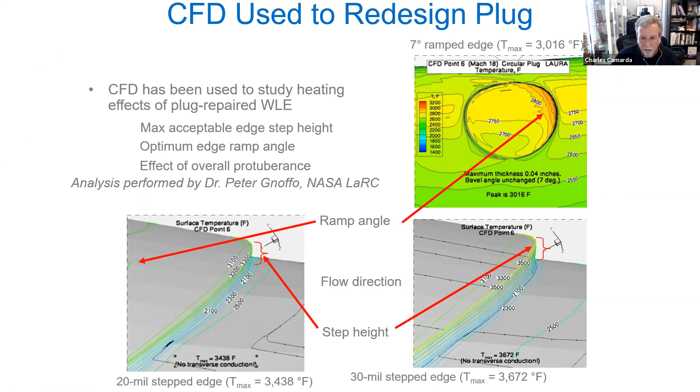With that information going to that expert, we were able to solve that problem in a short amount of time. We then designed a patch like you see here, and the leading edge heats up, but does not go above the critical temperature of the coating of the carbon-carbon material.

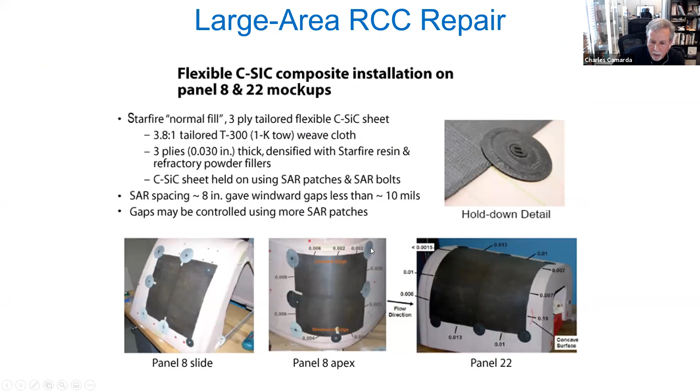So then we looked at not only small patches, but also a large flexible patch that we could carry in orbit, secured with the small patches we carry, so that we could actually fix a large pizza box size hole in the wing leading edge.

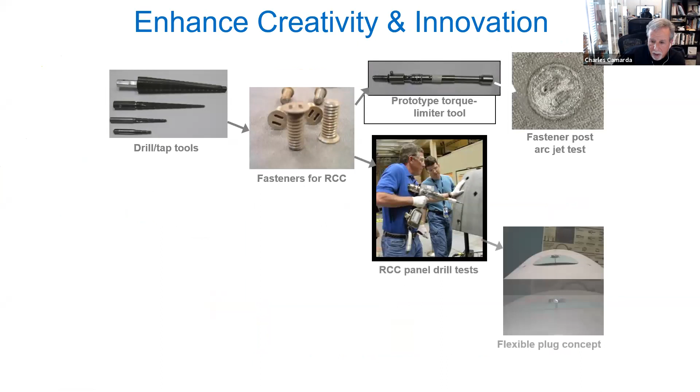This shows what a small team of engineers, like yourselves, could do, coming up with an innovative idea, maturing that idea to the point where we could prove it will work, then handing it over to a much larger team to do all the rigorous analysis and testing to validate these systems for flight.

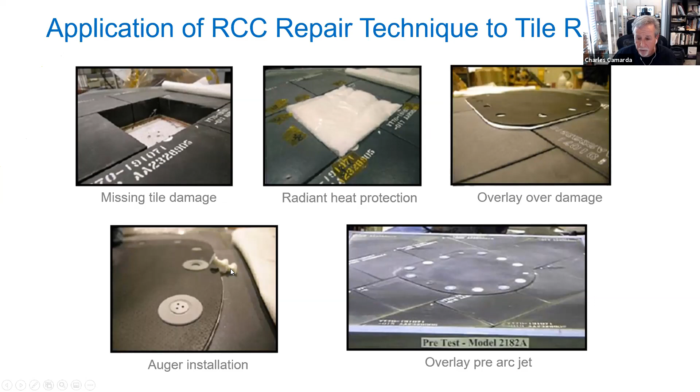Not only that, but some of the ideas we had for repairing a wing were also used by other teams looking at repairing shuttle tile problems. What happens if you lost a large section of tile? You could use an overlay concept like this. The fasteners would be different, but the mechanism for solving that problem was very similar.

So that's when we validated this methodology. We proved that it works.

What you're going to experience is working on these teams. We want to teach you how to work together physically as a team, but also virtually, like right now. We're in very tough times with this coronavirus, and it's forcing us to work virtually. How do we do that?

Luckily we're using Valamis as a platform. We could use other techniques for talking together, like Slack. Now you have the capability to link with each other, share ideas virtually, and connect with subject matter experts around the world to help you solve these problems.

This was the beginning lecture for the ICED methodology. You're going to go through all these different phases in detail with your instructors in Finland and in the United States, and these are some of the areas you'll get more training on.

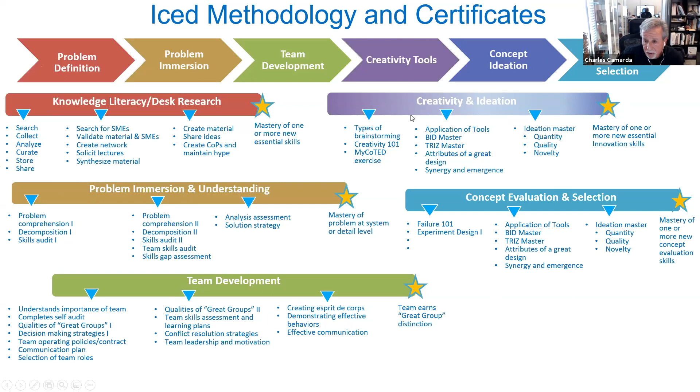Team development, problem immersion - how do you immerse yourself in the problem, how do you share that information and learn together as a team. You'll learn different techniques for thinking creatively, individually and as a team, and techniques for working together, program management, so that you satisfy all these constraints within budget and on time. Later this semester, you'll learn about rapid concept development.

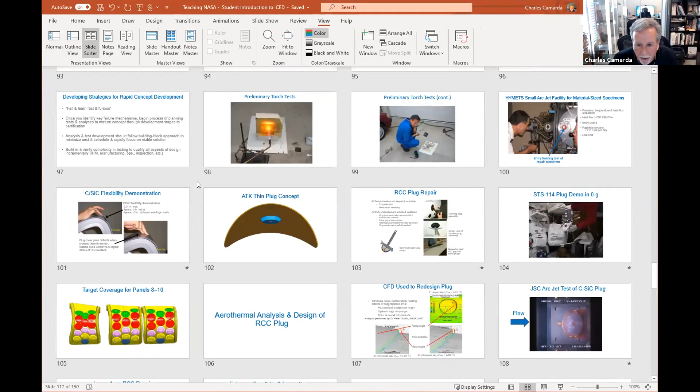When you look at this material, remember I told you it had a silicon carbide coating, right? That silicon carbide coating, when you think about it... can everyone see it now? Okay, the silicon carbide coating, Vinay, is very, very tough.

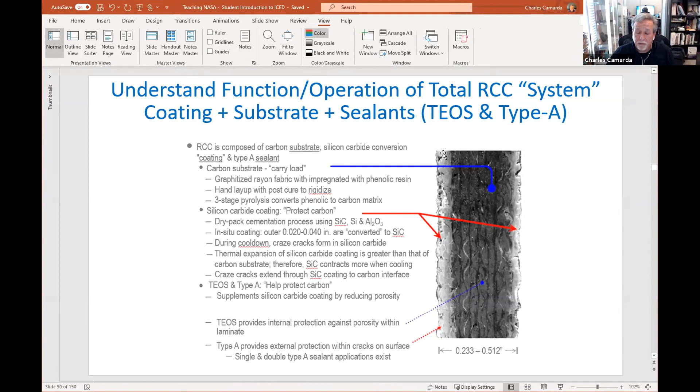As a matter of fact, they make drill bits out of this material. It's so tough and so hard that when people tried to drill through it, they looked at diamond tip drills, increasing the torque, increasing the pressure on the drills. What they realized was they could not drill through this carbon material. It was very tough, very hard, just the nature of the material. But it's also very brittle, right?

So as we were playing around with it in the laboratory, I just happened to pick up that spring-loaded center punch and hit it a couple of times. It cracked the coating.

The funny thing is, when you think about it—let me stop sharing my screen so I can see again—if you're trying to repair the wing leading edge, it would have already had some damage, right? So they should have tested drill bits on damaged leading edges, but they didn't do that.

When you think about it, astronauts going out there, it doesn't have to be a spring-loaded center punch. They could take a tool and basically just chip that coating. But the key was chipping the coating. And when you think about these really smart PhDs in structural mechanics and material science, people trying to design drill bits, no one thought of damaging the coating first and then drilling through it.

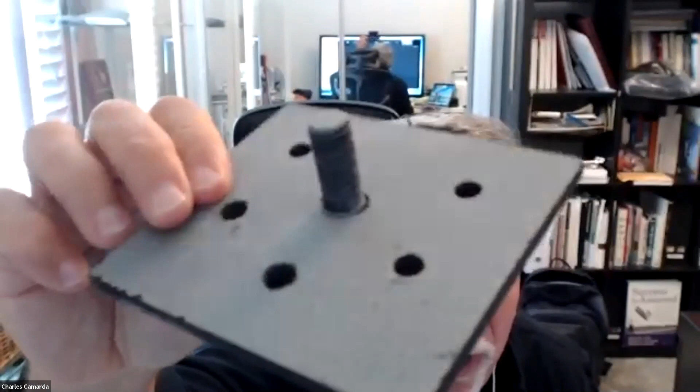This is one of the tests we did. You saw Don Pettit and I with the acetylene torch, right? But we actually were able to screw that fastener in.

But when you think about all the different things I wanted when I looked at this problem, I wanted to make it as simple as possible. So if I do not need a special screw or a special bit to drill and tap, I first wanted to look at: can I design a fastener just like wood screws and metal screws that drill themselves into the material?

I wanted to determine if I could design a fastener made out of carbon that I could just screw directly into the material, and it turned out we couldn't. But these are the things, because then an astronaut wouldn't have to carry this—he could just screw it directly in with a nice gun. This is what I mean by testing multiple different ideas simultaneously. At the same time we're designing this, we're also designing this, so if this doesn't work, I could use this instead.

Does that make sense? Yep. Does that? I just had one quick follow-up question as well.